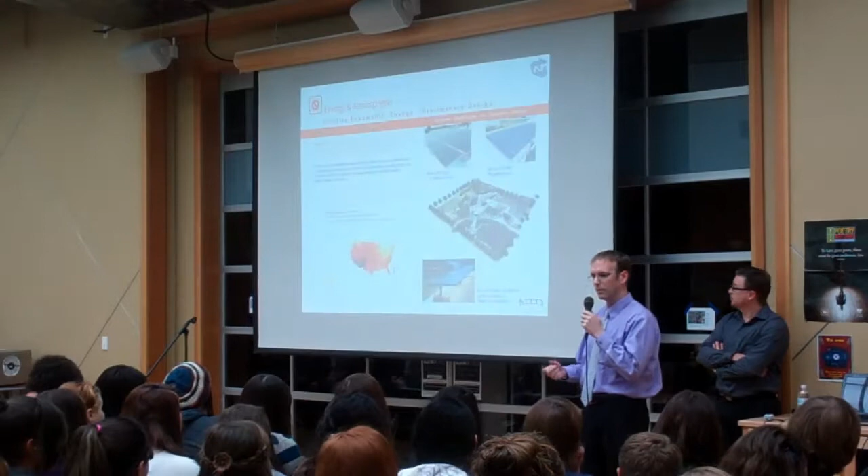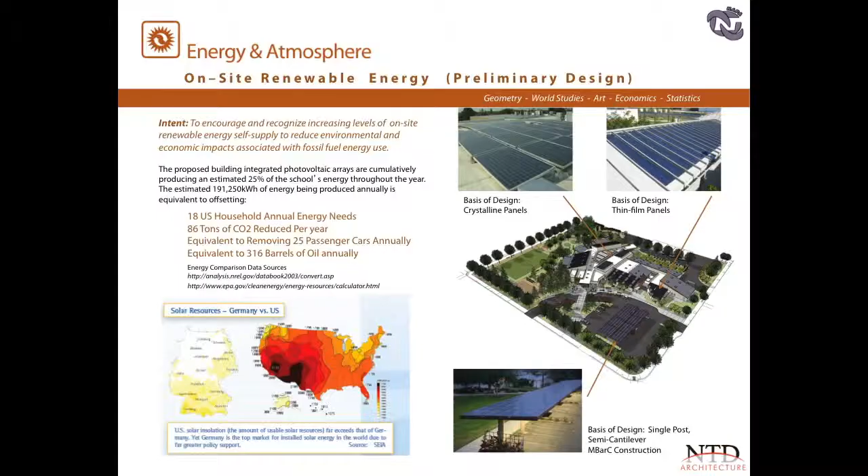There's a lot of various systems that exist in the industry with thin film and with crystalline, with carport structures, with rooftop installations. First and foremost, if you can pause here as we wait for the interference on the projector, there's an image in the bottom left-hand side. If you kind of blink with it, you can kind of focus on it.

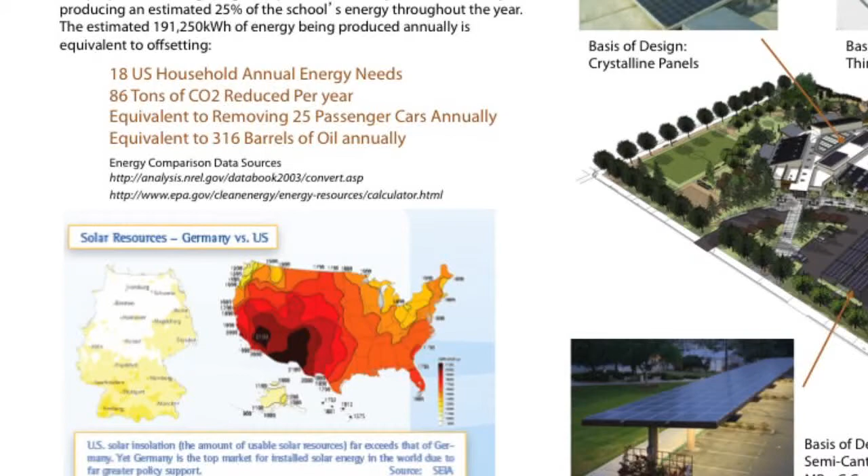That image begins to show you where in the United States the most opportunity exists to collect and gather solar energy. So everything from the brown to the reds has the most opportunity, and then from there, when you start going out, primarily up in New England, where you've got more seasonal impacts and such, they're less efficient. So what it shows you there is environmentally, there's tremendous opportunity of utilizing a natural resource, a renewable resource.

So what does that mean for Napa New Tech? We've got a system that's looking at both carport structures as well as rooftop installation. We've got a few pictures because I didn't think the school would be too excited about taking a trip up to the roof, so we can show you that. A rain check another day.

The PV system size is roughly a 109 kilowatt system. We've got a system generation that has the opportunity of producing about 154,000 kilowatt-hours annually. Now, what does that mean for you? We're going to come back to this a little bit more, but the renewable energy from the system on this campus can offset a projected 47% of your annual electrical usage.

Long and short, what that means is that's 47% that the district doesn't have to pay to PG&E, that they can keep in this district, keep in the classrooms, and keep in the programs for this community. That's extremely powerful.

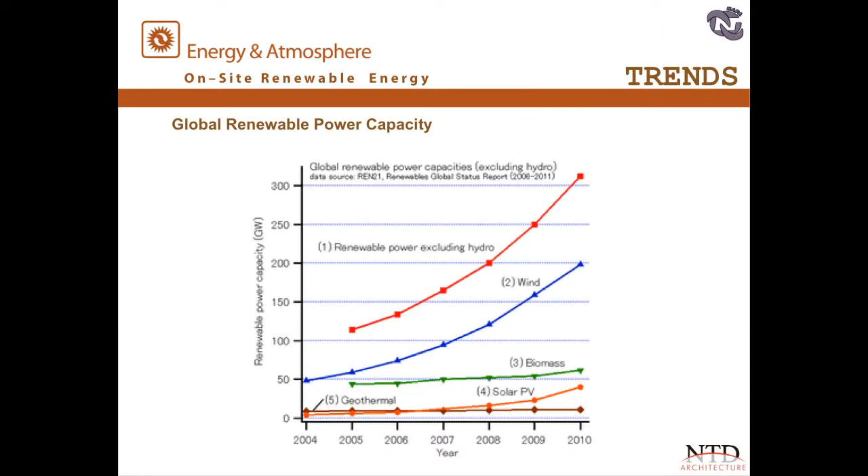Now, obviously, one can begin to question, if wind's that popular, why aren't we doing wind? What we have to always keep in mind is the infrastructure we're dealing with in an existing urban environment, where getting a windmill into downtown Napa probably would not work. So we're going to look at our constraints and our opportunities. But here are some of the natural resources.

What I find most interesting about this is really a developing economy, and a developing economy that is going to grow exponentially in our lives. And what I see about that is there's trends. There's now a consciousness that says we need to be doing more about protecting our environment.

What does that mean directly for you? How are these systems being designed? How are they being installed? More importantly, how are they being maintained? Tremendous avenues of growth and potential exist for professionalism and career pathways. Just the notion of where some of this renewable technology is going.

And then after the inverter, there's a few different avenues on where that goes, whether it goes directly back into the building, sometimes into battery type systems, or sometimes it just goes back directly into the grid. Ours here is going into the grid, and I'll kind of go back through that here in a little bit.

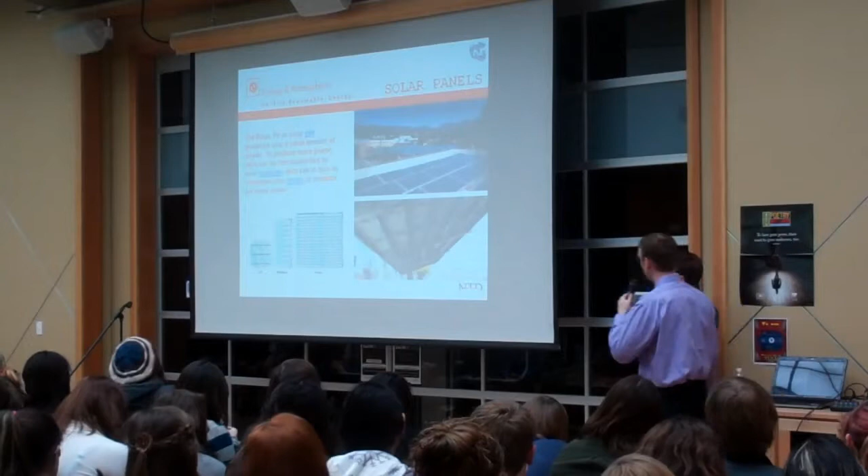The solar panels. Least common denominator, bottom left, is a cell. So the cell is the organizing component that is collecting the sun. From that, a collection of cells will make a module. Now, if you look at our picture up on the roof, you begin to see a collection of modules individually.

Now, those collection of modules are then wired in to create arrays. And those arrays are really what begin to create that economy of scale in order to collectively gather the energy, retain it, and push it back into the system.

Image in the top right was the field trip I promised you. Great views up there. Looking back out not only towards a portion of our rooftop installation, carport, and a nice little mountain view in the background. This other one over here, everyone has seen, in the parking lot. And interesting here, you begin to see that infrastructure and how the panel systems are wired and interconnected, and how those arrays actually function.

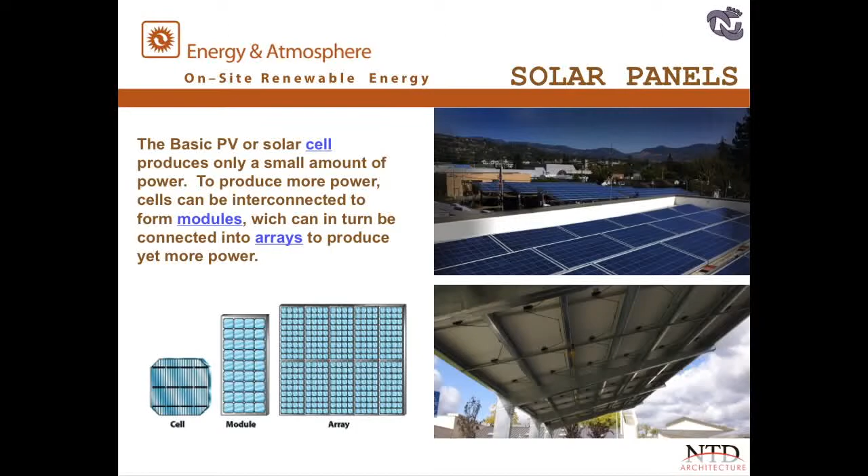Once we've gathered the energy, a little bit of science here: the sunlight is gathered in what's called a direct current. That direct current has to go to an inverter. The inverter then converts it to AC, alternating current. And alternating current is the power within the electrical system that we all use, various volts and frequencies.

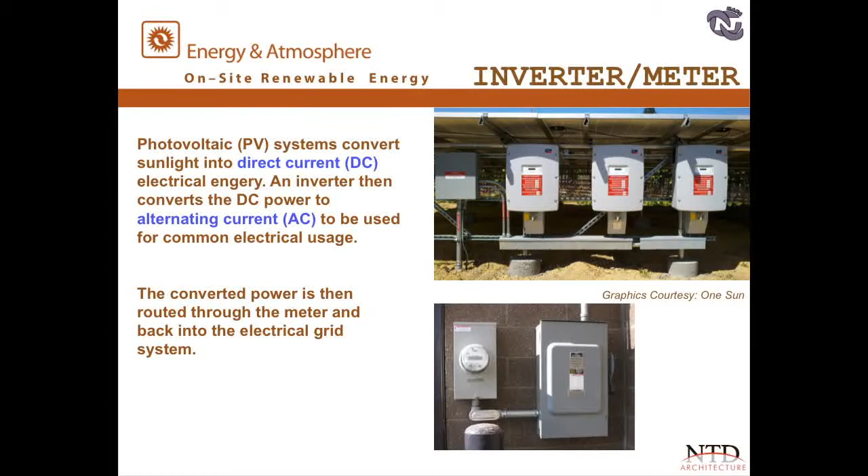DC power really is our source, but in order to use it, we need AC power. And then once we have that, the ability to tie back into the meter. And when you tie back into the meter with a PV system, it does actually spin backwards, that notion that we're pushing more energy. We can't see that here, but we can show you where we're actually going to be able to see it in a little bit.

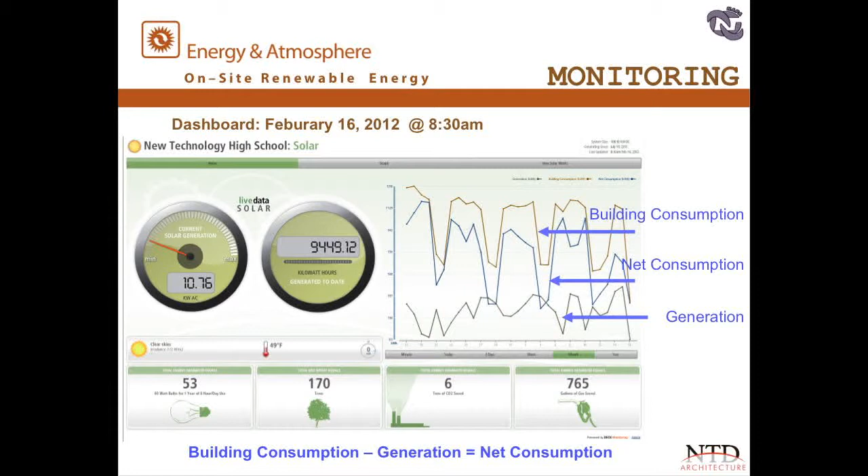Building consumption. So we start with what we base our usage on. Interesting fact, PG&E, Pacific Gas and Electric, have various rate structures. So depending on if you're residential, commercial or industrial, there's different rate structures. This campus was on what was called an A10 rate structure before solar.

What that meant was, before solar, I'll come over here so I keep my discussion going. We had rates that were based on, we had a summertime rate and we had a wintertime rate. And on average, that total rate was about 15 cents per kilowatt hour.

Well, PG&E says, well, if you're going to benefit from having solar, we're going to give you a different rate structure. If you're going to benefit based on the fact that you can gather energy when the peak time of the year, the sun's the hottest, the days are the longest, we're going to penalize you for that. Because if you've got to win, then where's our counter on that one? So what we actually are under now is an A6 structure called after solar.

And they break this out in a manner that says, before we just had a summer and winter rate. Now we've got a summer rate, on peak, part peak, off peak. We've got a winter rate, part peak, off peak.

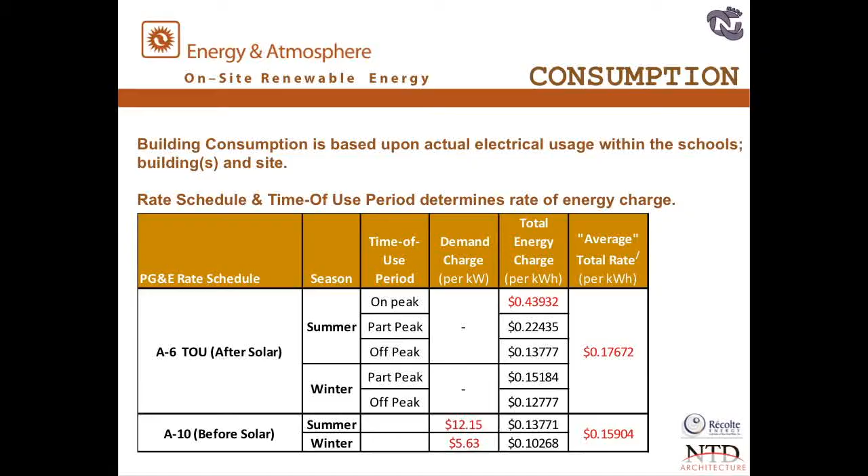Our solar rate for summer on peak is 43 cents per kilowatt hour. 13 to 43. That's significant. I'll come back to that in a second. So what does that mean? And we'll leave this presentation behind so you guys can have access to it after.

Summertime is May through October. So you've got 4 to 6 weeks of time at the start of that when you're in session. You've got probably about the same thing on the back end. During that period of time, from 12 to 6 o'clock at night, this site pays peak costs. So from 12 to 6 o'clock at night, every bit of electricity that's used is being applied that 43 cent a kilowatt hour rate.

So what that means is, I'm going to use classroom 4 as an example, and 1 and 2. Actually, let me use classroom 3 as a better example. Classroom 3 has their lights turned off. Classroom 3 is not consuming any building electricity. Classrooms 1, 2, and 4 right now are utilizing energy.

So that concept before, a building as a teaching tool, our role here is to begin to empower every student to begin to think about their environment and the importance and the role that they have in their environment. We've got some interesting opportunities that exist, and our monitoring system is going to allow us to look back by next December at an entire year of data that could begin to say, how efficient were we in January? How efficient were we in February?

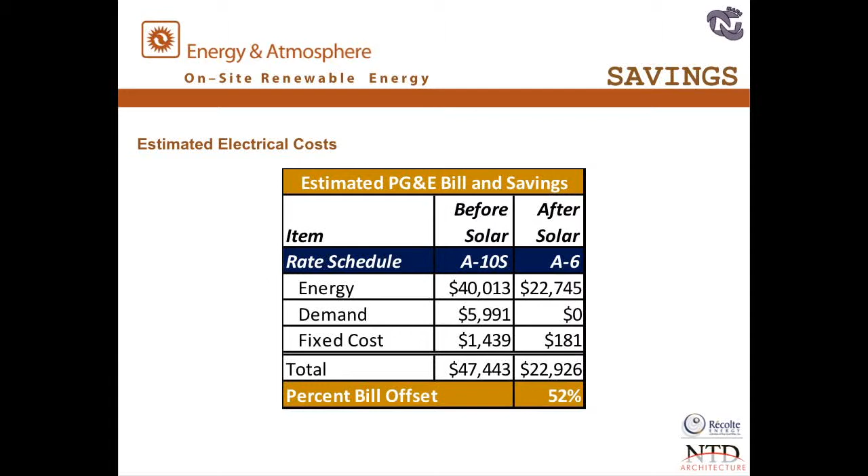The dashboard. So I wanted to come back to the dashboard here and talk to you about the tools that you have at your resource at the front monitor, as well as live that everybody can access from your personal computer. The link is below here, the little logo slid over it. I'm going to flip over to that dashboard right now. And we should be live, but yes, we are live.

Okay. So there is a little wheel up there turning under kilowatts per hour. So what we have here in this dashboard is a couple key items. We've got the kilowatt AC, so this is what's being generated right now. We have the kilowatt hours, so this is all live solar data. Ironically, if we had a cloud that came over us right now, we would actually see the live impact of what that shade coverage would be on our solar system.

What's interesting through here is we've got each of these tabs. We've got solar that's being generated by minute, by day, by 3 days. So here you begin to start seeing the cycles. Sunrises, sunsets, sunrises, sunsets. And once again, we begin to see the building consumption, which is always the highest in orange. We have the generation, which is in green, which is typically the lowest, and your blue is your net consumption, that of what you have to pay for. It's going to kind of hover in between.

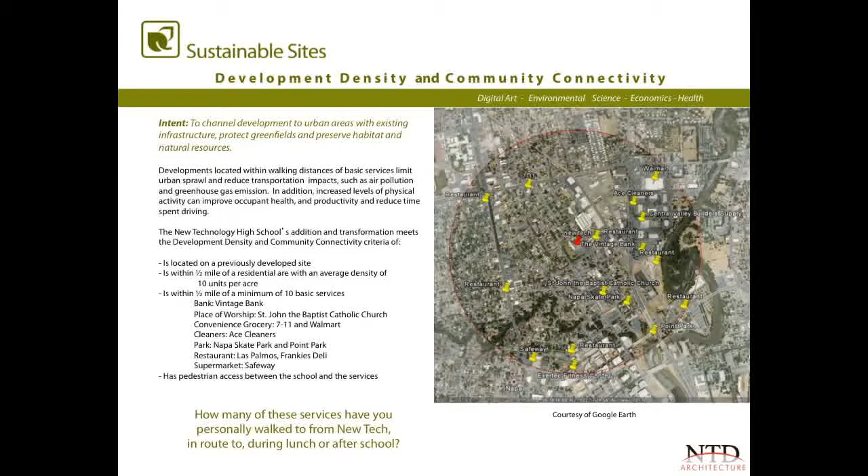Development density and community connectivity. How are you reducing your environmental impact by thinking about the facilities that surround the site and what you can walk to? We begin to identify what some of those are, and we encourage you to begin to think about that, whether it's before school, lunch, or after school. Walking has a tremendous opportunity of reducing our impact on the environment.

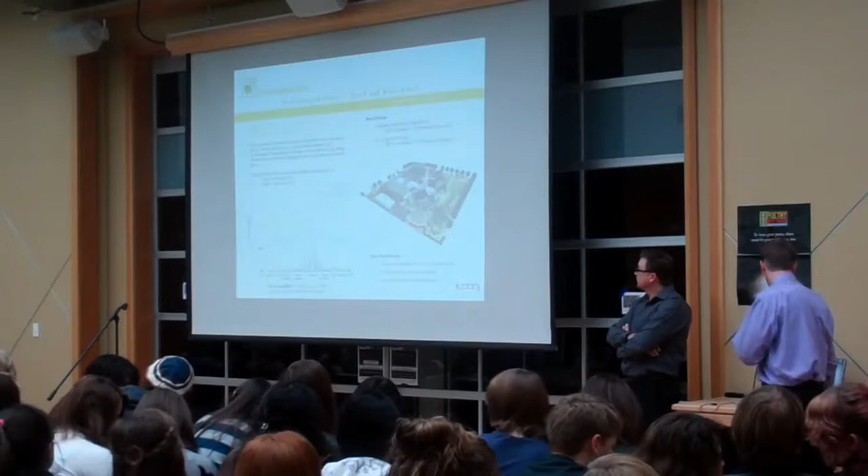The ability to look at both roofs and non-roofs. We've got a reflective white roof up on our roof. That white roof reflects energy. By reflecting the energy, it's putting it back into the environment versus driving it into the building, which then we have to worry about conditioning.

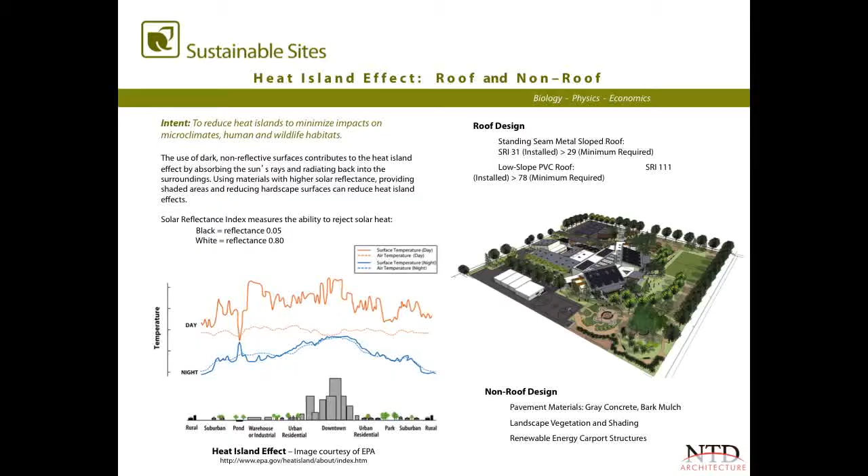We have obviously our PV shade structures and a lot of tree canopies and the ability to reduce that pavement such that you can actually be outside and enjoy it, where before, without shade protection and with asphalt as a great example, those systems heat up and become warm and they radiate, once again having a negative impact on the environment.

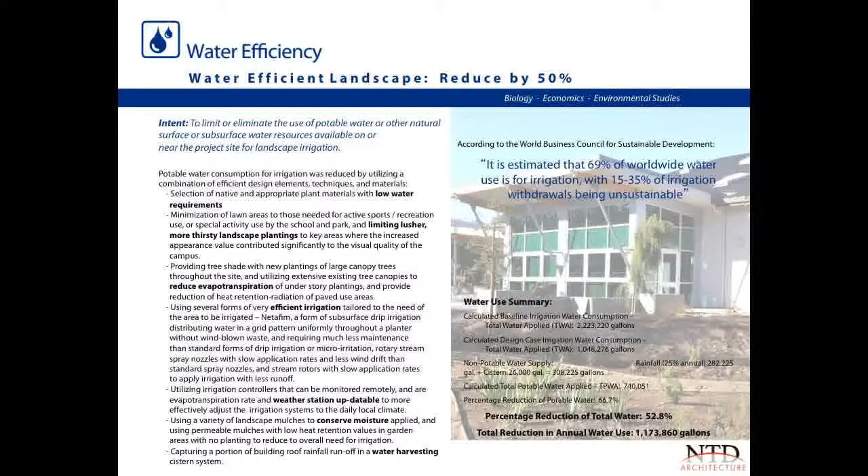Water efficient landscaping. We've got several systems here. Between the use of the landscape plantings, the selection of irrigation that was used, looking at the ability of keeping that water on site, our cistern, roughly 20,000+ gallons. The design of this one, by using all of these systems, is reducing over 1 million gallons of potable water annually.

So between what we could legally get away with based on a traditional school design and where we are with a sensible design solution, we're not using over 1 million gallons of annual potable water. Potable being drinkable, usable water.

I mentioned the water collection system. It's being fed from an area of the flat roof that sits right behind us over here. Unfortunately, he's probably feeling a little lonely this winter because we have not gotten the rain we've needed to keep it filled.

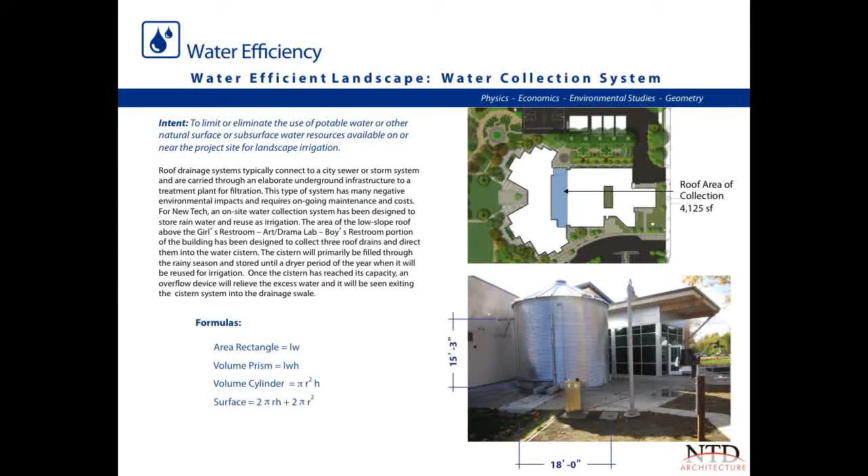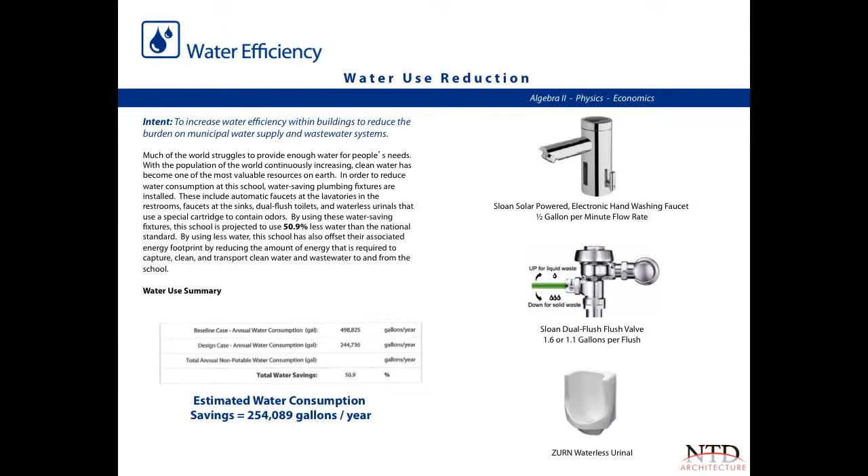Interior water use reduction. You probably all have seen we've got solar-powered water faucets. We've got dual flush toilets. In the boys' room, we've got waterless urinals. The selection of those fixtures is reducing about 254,000 gallons of annual potable water. So between the building and the site, we're saving roughly 1.3 million gallons of annual potable water.

What does that mean on the environment? That's less we're having to pull in. That's less that's coming through our system. That's less that's going out as sewage that then has to be treated. Those are direct savings.

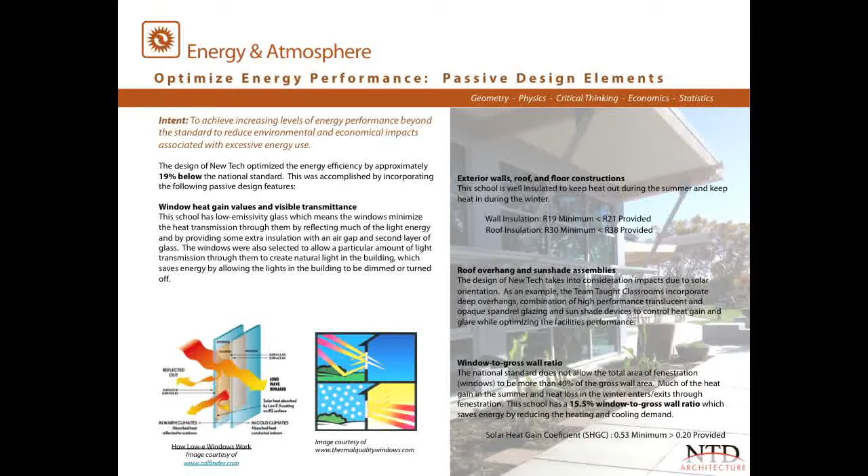We've got an optimized building envelope based on looking at both active and passive designs. Passive design is where we have built-in shade protection in some of our cantilevers. We've got increased building insulation in the walls and in the roof. Those items are inherent as part of the bones of the building and have a positive impact in reducing the amount of heating and cooling that we have to do and the amount of energy that comes in. We've got some specialty control systems. We've talked about renewable energy.

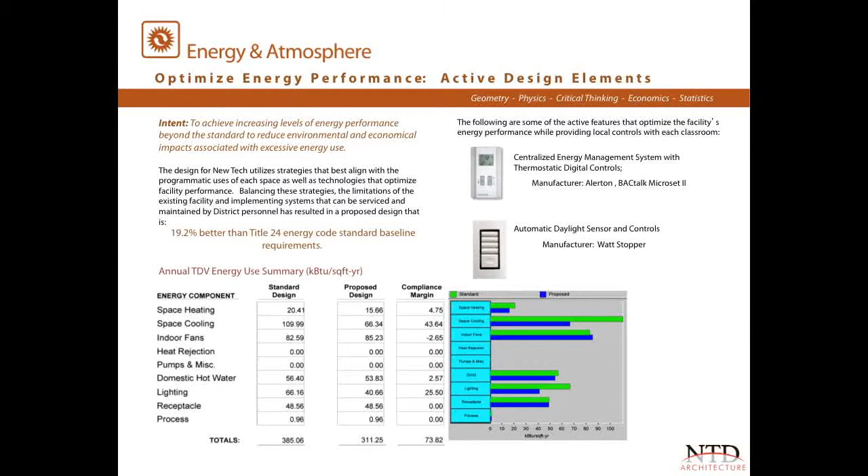Construction waste. On this project, we diverted over 90% of our construction waste from the landfill. So what that means is that 90% of our construction waste was actually properly recycled.

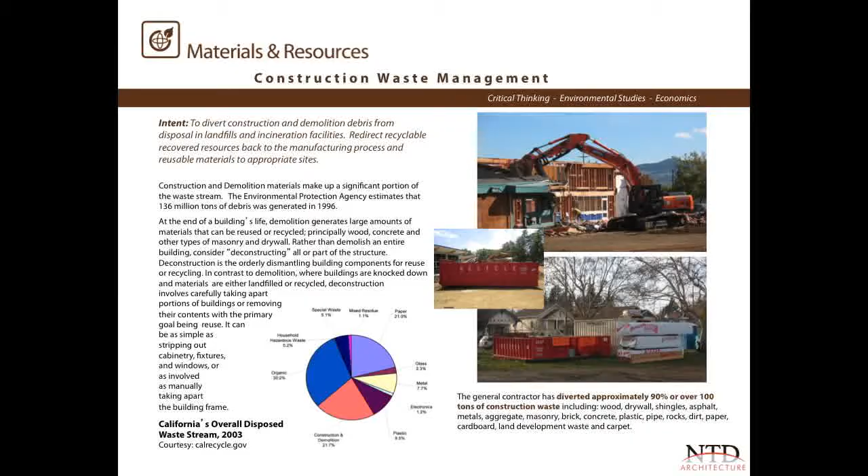So the challenge there, and I'm going to wrap this up right here, because I think this is probably a good point for it, is that we saw an opportunity of thinking about who you are, the culture, the learning modality, project-based learning, and to provide a tremendous amount of opportunities, resources and tools to really create this school as a teaching tool.

And if we can get contractors, who come with their own set of background and their own skill sets, to divert 90% of the waste that they traditionally would just pick up and throw away, then my challenge to you is at least 90% of your waste needs to be taken care of over here through proper recycling.